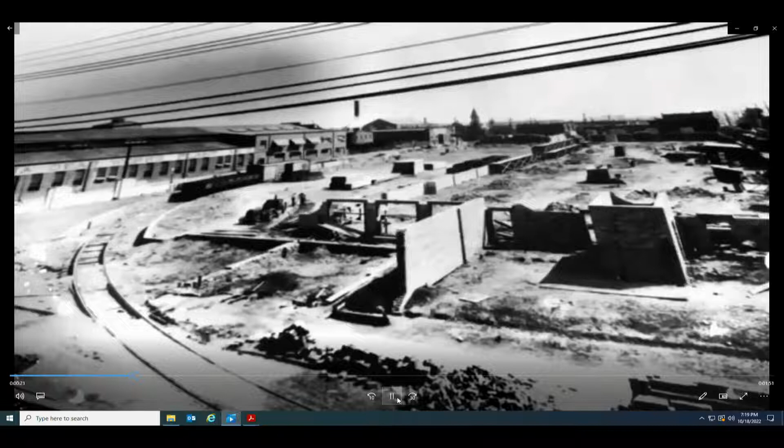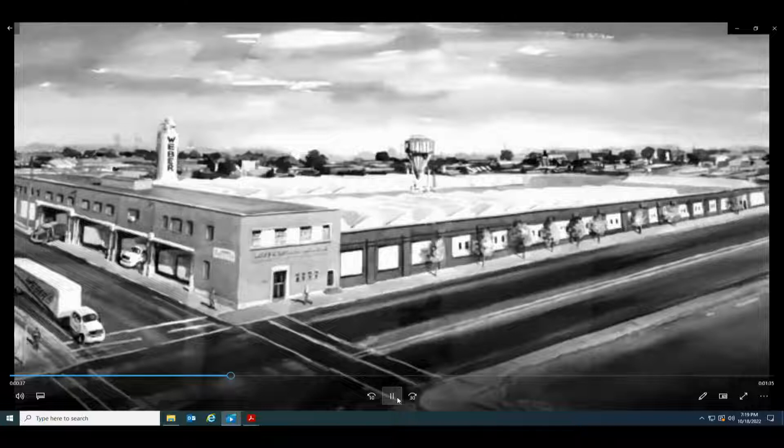Our first product was for a company called Stetson Hat, which back in the day was worn by every man, and we produced the boxes that the hats went into. It's a great story that a company has been in one industry and one location since the late 1800s. There's certainly not many companies that can brag they've been here for 125 years and still successful on top of that.

I think we've really been successful because of our people. We've all seen the old photos on the wall of the building being built and all the advertisements from the 50s and the Greater Philadelphia magazines. I find it an incredibly exciting opportunity to try to extend the legacy of people who came before us. You can only hope that it continues to grow and lasts 125 more years.

The facility we've been in right now, we've been in for 93 years. Today we employ about 170 people. Our sales are nearly $70 million. I think you can buy a lot of corrugated products without much personal interaction, but when we do it, we have a touch to it, and I think we hit the mark more often than we don't. The future brings a craziness that the country is going through as a whole, with speed to market, quick turnarounds, and competitive pricing. The future looks very bright for Weber Display and Packaging.

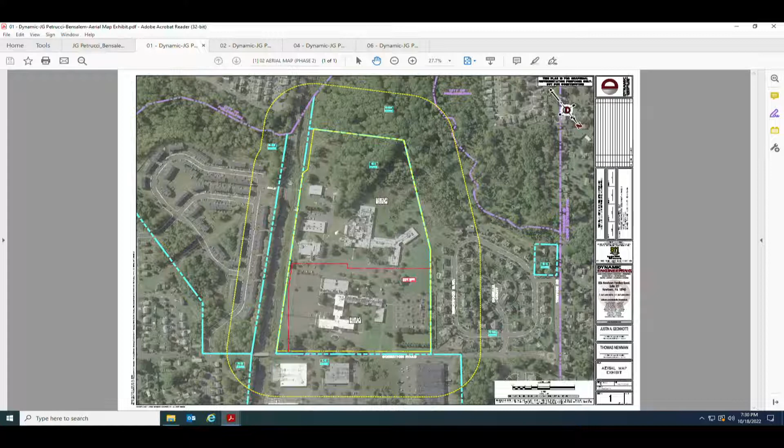There's 2 plan sets. Phase 1 is just showing the demolition of that existing building and the other existing building, and the reconstruction of an access road to serve Suez. So all these buildings back here are going to remain office buildings for Suez on a separate lot. All the parking facilities will be left in place to serve that facility.

Moving on to phase 2 of the plan, this is where you see the construction of that manufacturing facility along the frontage of the road. Right, so that's okay. Are there any assurances in our zoning or otherwise that the back would remain an office building?

I'm a little concerned that you have a manufacturing building in the front, and then you sell the office building later to another manufacturer, and then you have more trucks coming through. The lease that Suez has with Petrucci, the owner, is another 12 years, so that's all I know, that it's going to remain there for that length of time. Suez wanted, as part of its sale to Petrucci, to retain for at least 12 years the opportunity to continue to lease that space in the back, so.

Okay, Joe, is there anything that can be done zoning-wise or restriction-wise to just say that it's an office and not a manufacturing? Or is it too late? Well, the one question that I had, which is sort of along the lines of yours, Mr. Knowles, is...

I didn't see on the plans, but it may be there and I just missed it, an indication of an access easement from Lot B out to Somerton Road. I see the condition, a driveway shown, but I don't see any sort of an easement over the separate parcel. Right, that's in the review letters, and that is a condition of approval that we have to provide that access, part of which will be on the future Weber lot, that they'll get back there with that.

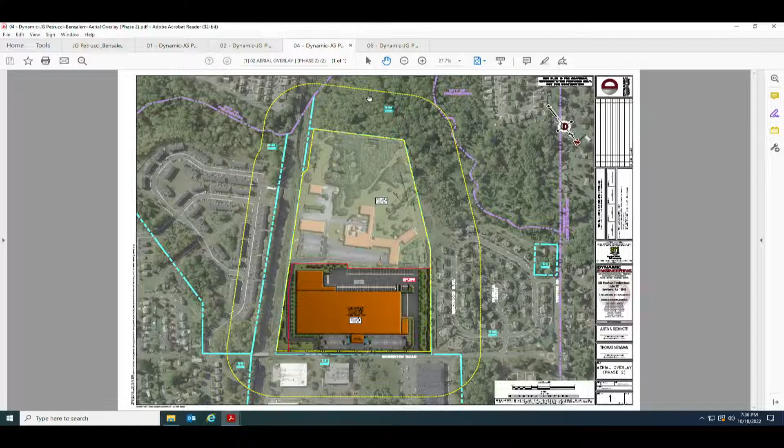I know, like part of the spot zoning - part of the township's vetting of this project up to this point has been that the rear would not be industrial as well as the front. That the rear would remain office, which was at least part of the consideration as the township was vetting this, particularly in terms of the proximity of the property to the residential properties nearby, that you wouldn't have manufacturing or industry both in the front and in the back.

Again, as you've heard this evening, the intent is, and the lease reflects, at least for the moment, that the offices in the rear would remain as such. But if tomorrow, for whatever reason, the office were to close up shop, then yes, whatever's a permitted use in GI would be a permitted use on that rear acreage.

But that doesn't have anything to do with what we're doing right here. No, other than the fact that Mr. Knowles asked a question. Right, so we can go forward with this and handle that later. Yes, we're going to do the other later.

Let me ask you this, as a gentleman's agreement, would you be willing to come to the township and make a presentation that you would request a change of zoning to allow offices to be there? I'll be happy to take that back to Petrucci. Greg's not here this evening, so...

It would be better if you were cooperative with it. That's right, we could do that anyway. Different firm, different situation. Yeah, I know, you don't own it. Bring it back to him. Okay, I'm just putting it out there for consideration.

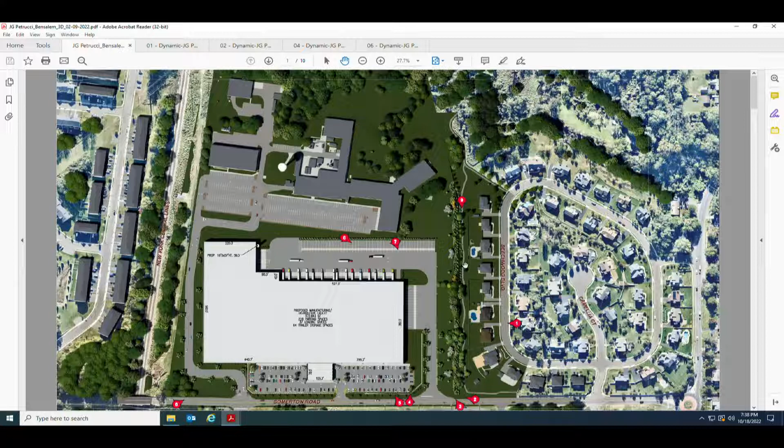They had a walking trail and a buffer already in place between that residential use and what's always been an industrial use. As part of this improvement, there have been discussions with township staff, and there's going to be a substantial buffer added between the two uses, with substantial plantings to enhance the buffer that's already there today. Due to the topography of this site, the manufacturing building itself is set at a much lower elevation than the neighboring residential use.

We did that on purpose so that the area between the residential area and that access drive is actually a berm, which puts the landscaping at a higher elevation and helps to screen the building as you drive down the road. That walking path you see on the screen exists today - that's not an artist's depiction, that exists as part of the development of Beechwood Estates.

The property line is right on the edge of that walking trail, so everything to the west of that is going to be additional open space, owned by Weber but protected that way. Your ordinance requires 90 feet of green space between the property line and any improvement, which we're providing. The building is another 200 feet away from that, so between the property line and the building you're at least about 300 feet away, with an enhanced buffer and substantial grade differential.

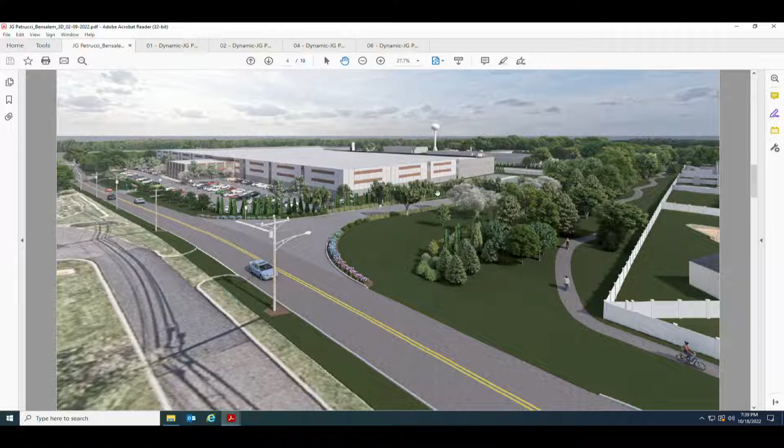Is there any other questions from council members? Is there anybody in the public who would like to come and speak for or against this plan? Okay, seeing no one come forward...

Is there a motion to approve this as a preliminary and final, which is one of their requests, with the will complies? I put a form of motion, Mr. President, that we approve the applicant based on the October 12th, 2022 traffic planning and design letter. Relative to this, the applicant will comply with all the zoning issues that have been resolved to this date, and we go to the subdivision and land development ordinance.

I'm going to go to section 4. I'm going to ask that the applicant will comply with 1, 2, 3. I'm going to ask that we grant a waiver for number 4, and the applicant will comply with 5 and 6. The applicant also will comply with the stormwater management that's been presented to us. And that's what I have.

Joe, you have anything else to add to that? Yes, as was suggested at the outset of the hearing, the applicant will comply with all of the requirements of the township fire marshal and the fire rescue department as they apply to the plan, and will comply with the requirements of the August 31, 2022 traffic review of TPD. The applicant will provide to the township engineer and the township solicitor for review and approval deeds for the newly created lots, which reflect the easement as well as any easements required, and an easement agreement for access from Lot B to Lot A. Those would be the conditions for council.

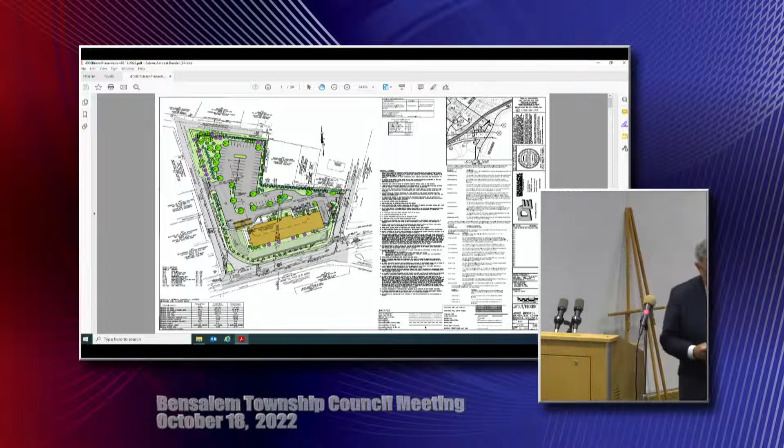The plans before you tonight are dated October 12th, 2021. They've been revised 3 times with the last revision date of September 15th, 2022. We are requesting waivers, and for the council's edification, I could provide you with a list of those requested waivers along with justification. That's an old one, so we wanted to update it and provide you with the current. Thank you.

I have John Richardson tonight from Dumack Engineering. He'll just review quickly the site and then go through the requested waivers and the comments for the township professional review letters.

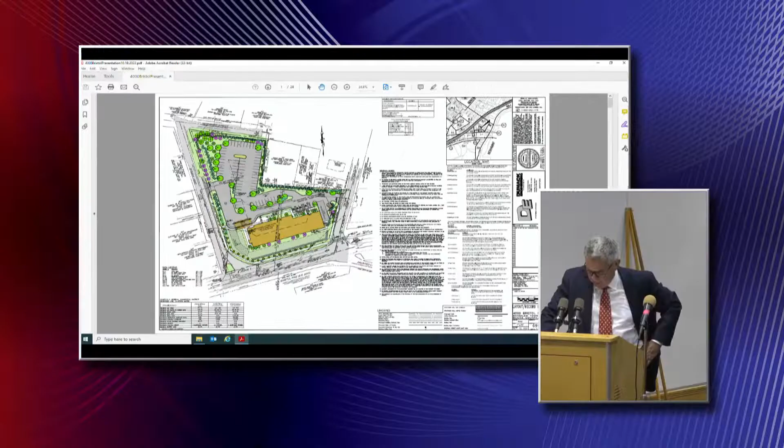There is one issue that I wanted to bring out at the beginning, and that is the denial of the fire marshal to the original plan. We've been working with the fire marshal, and I believe Mr. Pizzo will advise you that we have satisfied the fire marshal's concerns by way of several tweaks to the plan. Mr. Richardson can go into more detail.

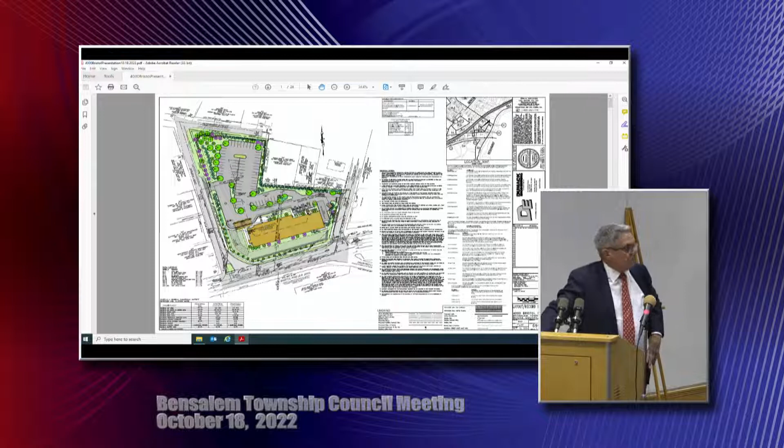Basically what we're doing is we're adding an additional fire hydrant. There was one proposed, we now have two. We're relocating both of those fire hydrants. If you're looking at the plan, they would be on either end of the hotel on the rear portion away from Route 13. He also requested some bollards and a chain across the fire lane on the side of the building to the left of the plan, and asked for the relocation of the fire department connection to the loading dock, which we've agreed to, and also the removal of some shrubbery so that the fire department connection is highly visible.

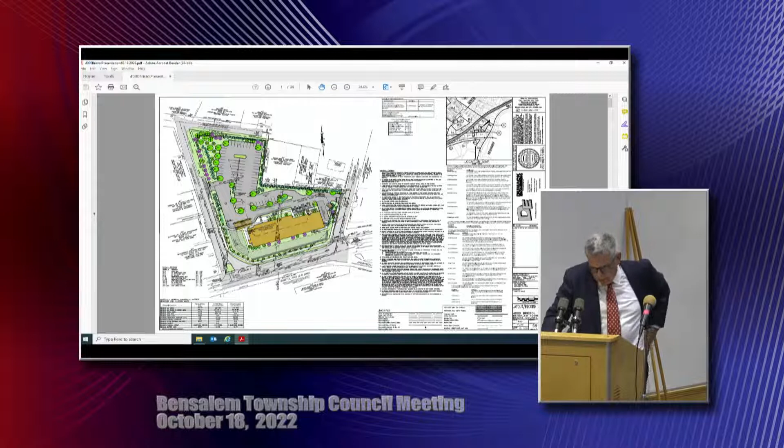So that was the gist of the conversation, and I believe once we go through the review letter, that will be item number 29. I know the review letter looks extensive, but so the council understands, of all the comments, there are 4 that are will-comply, 11 of the comments are waivers that we're requesting, 1 comment is informational in nature, and the other comment had to do with the fire marshal.

Those are the SALDO comments. And then with the stormwater management ordinance, basically they're either will-complies or requesting waivers. So even though it looks like a lengthy, convoluted review, I think you'll see that it's pretty straightforward. So with that, I don't know how you would wish to proceed, Mr. Knowles. Yeah, he can present this, and then if we have any questions, we'll have an opportunity to ask him questions, I guess.

All right, that's good. So the T&M review letter dated October 6th of 2022, that's the third review letter. I'll go through that. The first page, there's nothing on. The second page, these are all just informational comments. The third page, item number 1 is a will-comply.

Is this under subdivision? Yes, this is under subdivision and land development. Okay, so you're talking about Chapter 202, page 3. On page 3, D1 is a will-comply. On page 4, D6 is a will-comply. Number 11 is a will-comply. Number 14 is a will-comply.

And then 15, 19, 20, 21, 22B are waivers, as is 22. So that's 15, 19 — the 16 and 18 are done. 19, 20, 21 and 22? 21, 21B, 21C, and 22 are all waivers. Okay.

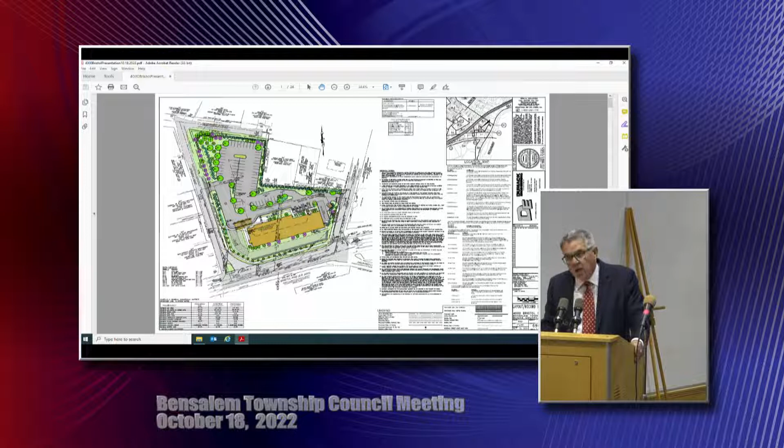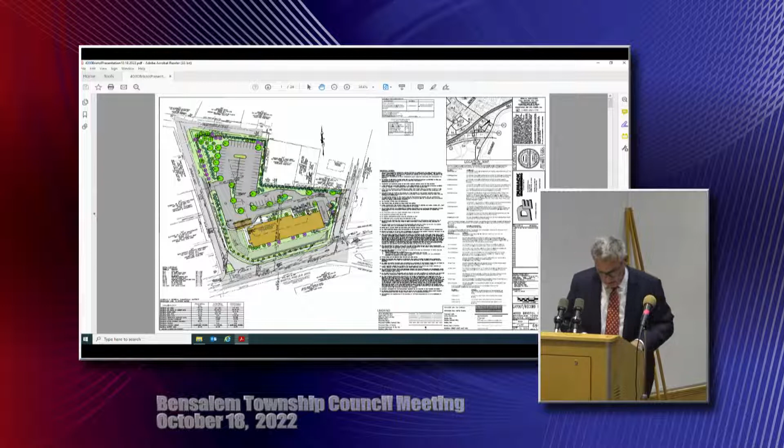Would you like to go into the traffic? Or would you like to discuss that? Maybe have somebody that could generally tell us what each waiver is. Oh yes, sure. I didn't know if you wanted to cover that now or after we went through all the comments. No, I'd rather cover that now. So I'll have Mr. Richardson go through those waiver requests, so we can have a general idea what the waivers are, and then Phil can make sure that he's fine with them.

Good evening. I'd like to refer to the letter Mr. Tovine just elaborated on, specifically the waivers, going through the same letter point by point. This is in regard to number 15 from T&M's letter, the waiver request.

Wait, which letter are you referencing? We asked you to do it the other way. Do the letter dated October 6, 2022, and go through the numbers we just discussed. The first one would be grading, number 15. There was some confusion about which number was said, but it was confirmed as 15.

That's a waiver to allow grading within 3 feet of a property line. The property has already been developed, with existing features and modified topography within 3 feet. To remove some of those features, we have to provide grading within 3 feet of the property line.

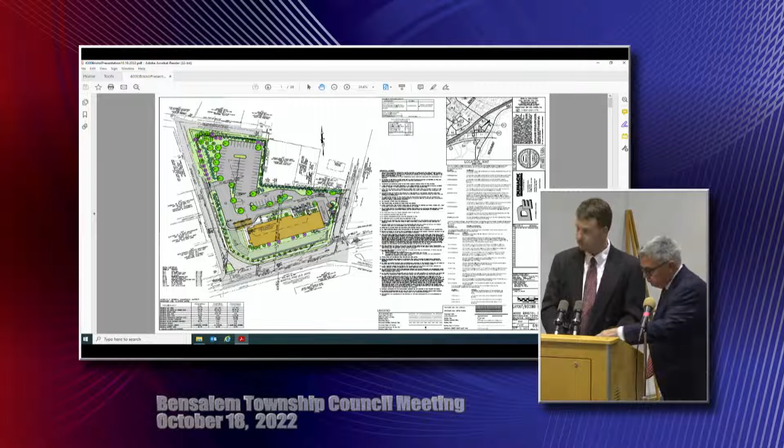Are your calculations based off of the 100-year flood? Correct.

And you correct me if I'm wrong, but she's saying that to help the neighbors in the back with the flow, you have to do it that way because of the way the ground goes. Correct. Yeah, I know, again, I'm not an engineer, I'm not an attorney.

But when you're telling me the difference is 4 inches versus 12 inches, I can calculate that and say it's an 8-inch difference. Yeah, that's a lot. I mean, I don't know, maybe I just don't know what I'm talking about.

There's 4 inches between the water level and the top of a manhole cover. It doesn't matter whether it's 4 inches away or 12 inches away, as long as it's not coming out of the top of the manhole cover. 4 inches is a splash away, as opposed to a foot away. We essentially have 4 inches of freeboard, if it goes above 4 inches. Would you rather have 4 inches of water in your home or 12 inches?

Hold on, wait, that's not what they're saying, that's not what he's saying. So you're supposed to have 12 inches at worst-case scenario. Is that correct? You have 4 inches at worst-case scenario. So that's a loss of 8 inches, not a gain. There's a gap of 8 inches. There should be a gap of 12, there's only a gap of 4.

This is what we're talking about. If there's a gap between the water level and the top of a manhole cover, it's still not getting out by 4 inches because of this elevation. The difference is 4 inches between the water and the top of the manhole, or top of the grate. Now, if you go lower, you don't have enough pitch for the water to go where you need it to go. So they're going with a narrower or a shallower inlet, so to speak, that allows for flow through that.

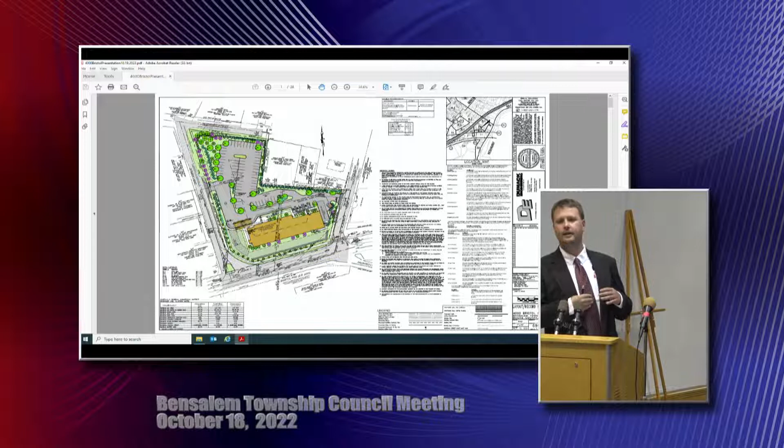In regard to the absolute number, let me just get the number. It's two inlets along that property line that this would apply to, and then there's one down by Bristol Pike that the same thing applies to. That's completely on our property, and it's actually the outlet from the dry well. And that again is down low by Bristol Pike, so that's completely contained on our property. So it's a total of 3 inlets.

I believe we're on number 19. 196-61B12, and that is to allow less than 24 inches of cover over pipes. This is kind of the same area, it's that low grade. We are providing the manufacturer's recommendation for cover over the pipes. That 24 inches is probably a reference to RCP pipe. The plastic pipe that we're proposing, we're following the manufacturer's recommendations with the 12 inches.

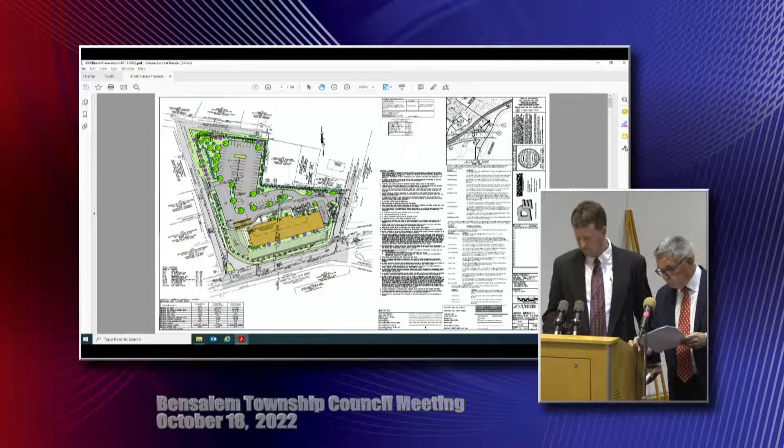And where are they located at? Primarily right along there, it's again the low freeboard. So it's the drainage for the manhole cover, for what's going into the inlets, coming down, going into the inlets, into the drain pipes, and the drain pipes will be 12 inches down rather than 24 inches down? Correct. Is that basically what he's saying? Which is one of the reasons that you use the flexible pipe now, so you don't have to dig as deep to catch the water.

And the 12 inches is adequate by the manufacturer. Now when you say adequate, I know we're supposed to go down a certain depth for pipes for frost and freezing. How does this affect all that? I'm thinking of the frost line, the freeze line.

Are you talking about it backing up from freezing? Well, no, if something gets into the drain system that backs it up - dirt, who knows - it could be anything that backs up a system. I'm saying then the water would accumulate and freeze and back up the whole system, would it not?

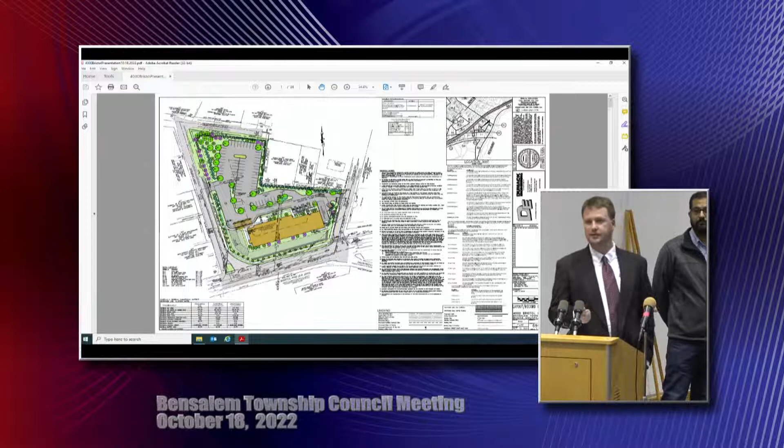And we're providing a fair amount of landscaping on the corner property, and we're providing some landscaping all along Bristol. Are you interested in the species and stuff like that? Will it be something tall?

I'm worried about the lighting going into, I believe, 4 houses on Neshaminy Street. I'm also concerned about the safety of the neighborhood, and I do appreciate that we're getting rid of a lot of the issues on the backside. I'm not discounting that, I'm just asking, since you're doing these improvements, especially for the 3 houses that buffer up to it, in terms of making it safer, so somebody's not just walking through to their property through a tree and having issues there. In today's world, unfortunately, you have to ask those questions.

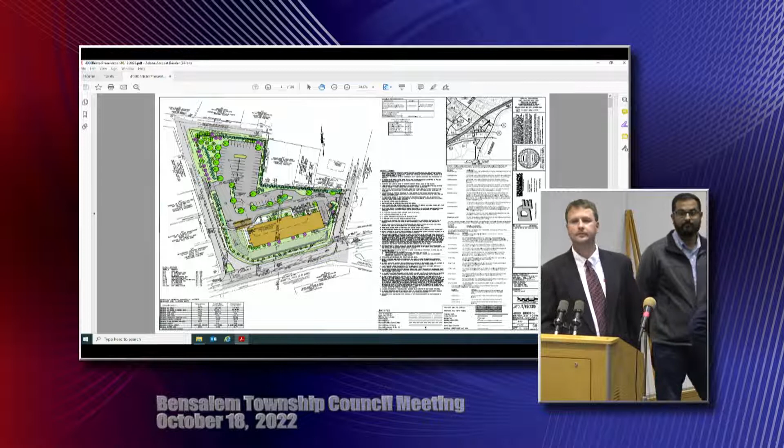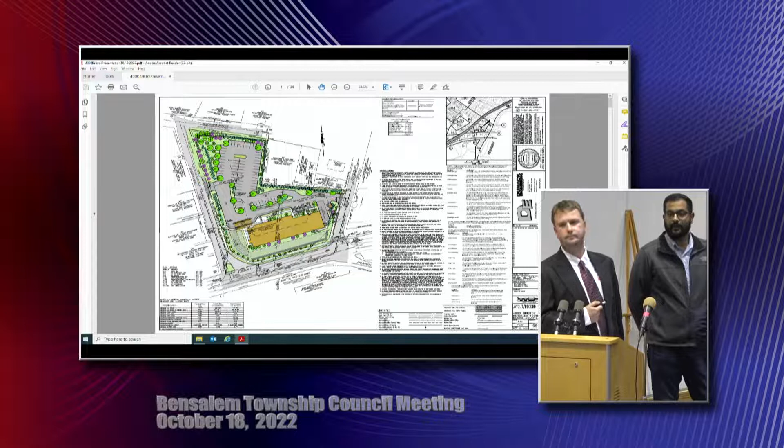So do you want to provide fencing along the back, along Chamonix Street? We were going to do it anyways in the future, we were looking at it. Okay, because it would make more sense, for the safety of those people. I do appreciate the fact that, I know what you guys deal with now. Okay, so we'll do a 6-foot privacy fence across the back?

We can do that, not on the right though, there's nothing there, just woods. Right, across the back, between where all the neighbors are, we would fence it, where the neighbors are on Totem, the neighbors you get right off of there, and then along that section right there, not on Chamonix Street. On Chamonix Street, you're going to have a buffer of trees, I think.

In regard to lighting, we are providing lighting in the parking lot. We provided calculations to the township that show that the lighting levels are at an acceptable level at the property lines.

And you'll make sure that if they ever go out, you get them fixed quickly, because the one at Chick-fil-A up on Horizon Boulevard's been blinking for months, like a strobe light. Well, the ones we're proposing are LEDs, so they don't strobe, supposedly. They're supposed to last 20, 30 years. So they won't be facing anywhere into the neighbors on Chamonix Street, they should be going straight down, to not affect those houses.

You're going to add the fence to the plans? We'll add that fence to the plans. Okay, so that would be an additional thing. That's an additional thing for the fence, we're just saying it. Is there any other questions?

If not, is there anybody that would like to speak for or against this? Before we go any further, I have a question. I think you may have answered it earlier, but I want to make sure that you have an underground basin, and where is that?

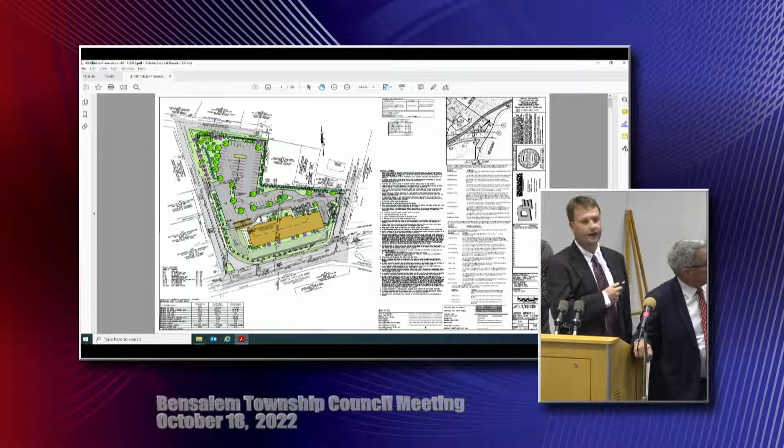The underground basin is kind of an L shape roughly, and it goes along here. It discharges down into an existing storm pipe that then discharges down to Neshaminy Creek. As part of the development, that piece of pipe that goes down along there is inadequate. Not only are we reducing flows to that pipe, but it's so inadequate that we're actually increasing the size of it from a 24 to a 30 inch.

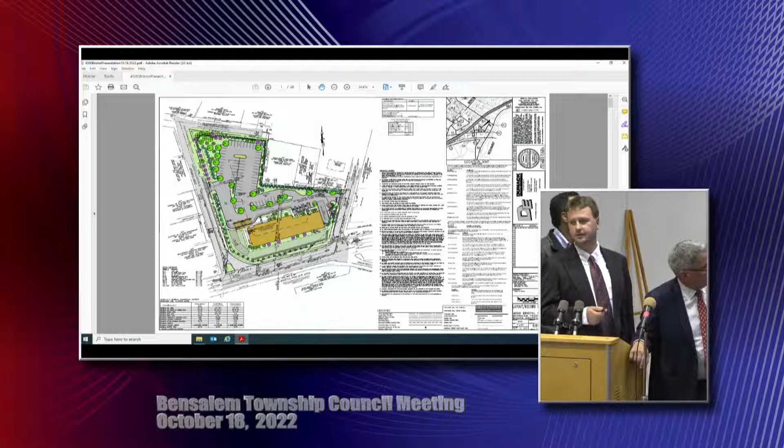That's a good location for it, okay, that's good. I wasn't sure if it was up there. Yeah, and that takes it all the way down and literally discharges into the Neshaminy. That's good.

That was it, Jeff, okay? All right, Phil, do you have something to say, or are you okay?

No, the pipe issue and everything else, they have to get a PennDOT permit for that. Right, all that issue too, good.

Okay, so is there anybody that would like to speak for or against this project from the public? Okay, seeing no one come forward, we'll close public comment. Does someone want to make a motion in reference to...

Sri Gayatri Corporation, 4,000 Bristol Pike, the new hotel, tax parcel 276-70 and 276-741.

I'll make the motion, Mr. President, although I got lost a little bit through there, so Mr. Pizzo, you can pay attention to me, help me out on this one. This is for Sri Gayatri Corporation, 4,000 Bristol Pike, and the tax map parcel is going to be...

02076-070/02076-074-001. My first part of the motion would be to make sure these properties are going to be consolidated into one and recorded up in Doylestown, and that presented to our solicitor. Is that correct, Mr. Joseph? Yes, a deed of consolidation will be presented to the township for review and approval by the township solicitor and the township engineer, and will be recorded contemporaneously with the record plan.

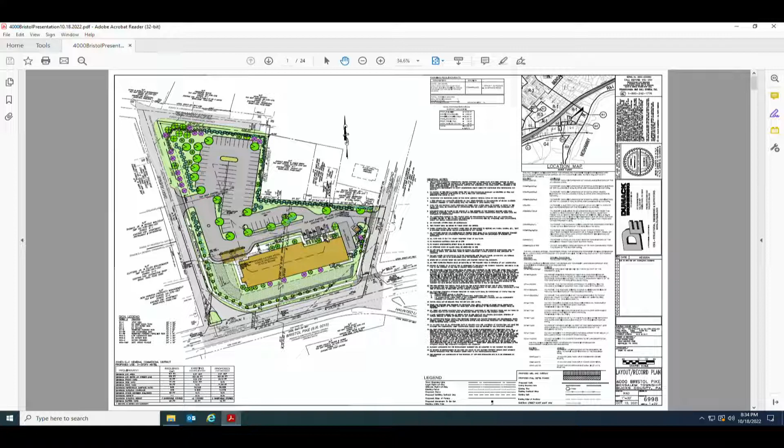Is there anything else, gentlemen? No, I think you're good. Mr. Pizzo, as far as you know, Mr. Kisselback's motion is good? That's correct, and there is an acknowledgement that the property has already been rezoned by court order from AD to entirely GC, and that the consolidation has already been referred to. That'll be done as part of the filing of the record plan.

Okay, so we have a motion to accept for 4,000 Bristol Pike, according to Mr. Kisselback's motion. Is there a second? Second. Ms. Benitez, all in favor? Aye. Any against? No.

Good luck. Thank you. Hopefully it'll be a nice thing there, and we clean up that area. Be a good neighbor. Absolutely. Thank you, sir. Good luck. Congratulations. Thank you, guys. Yep, thank you. Thank you.

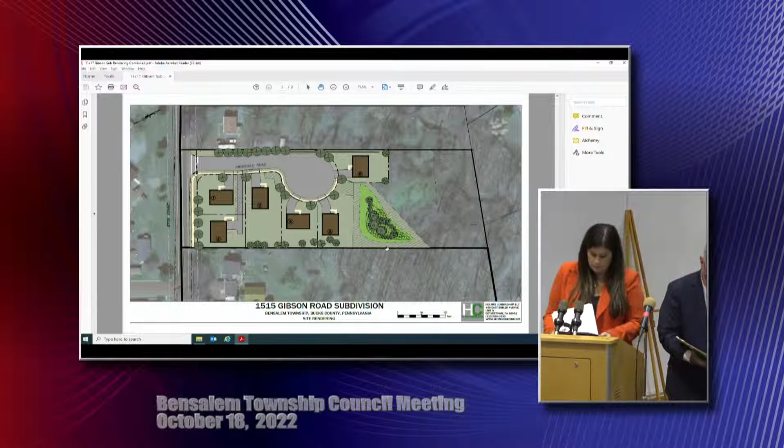Is there any questions regarding the development itself, or any questions or concerns anyone wants to address with the engineer? Yeah, I have a question. The one lot, I guess it's number one, I can't see it from here. The bottom lot, there's two piggyback lots on top of each other. The bottom lot, Lot 2, why is that not defined as a flag lot?

It has frontage along Gibson Road, so it meets the requirements of a standard lot due to the frontage, but the access is being taken from the cul-de-sac. So the driveway has an easement over Lot 1 to take access to the cul-de-sac, but it has the required street frontage along Gibson Road.

So the person on Lot 1 now loses that side to use because of the driveway? So in essence, they're paying taxes for somebody's driveway? Yes, it is subject to an easement along that portion. Is it also going to be their driveway too? There's a separate driveway shown for Lot 1. Yes, and Lot 2's driveway goes across Lot 1, and it's a paved driveway.

Which would be part of the impervious surface for Lot 1? It would be, yes, because the easement doesn't come out of the lot area. So yes, it is part of the impervious surface, and it is compliant with impervious coverage.

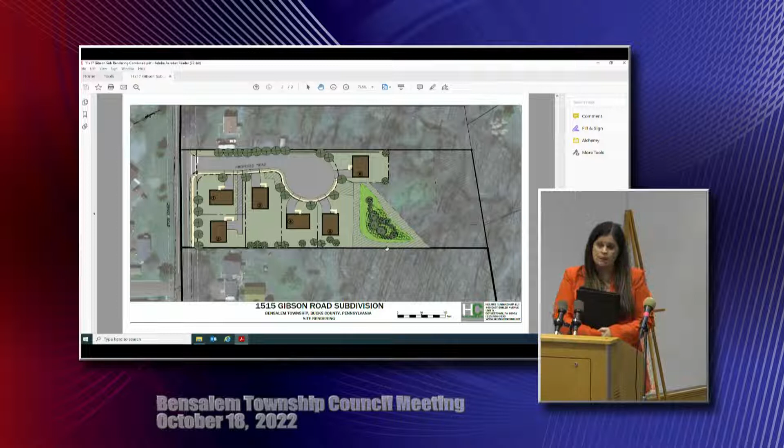But if Lot 1 wants to do anything, now they have to consider this paved driveway on the side of their house? They would, and part of the reason for the location of that driveway is keeping direct access off of Gibson Road. As for the location of the cul-de-sac, if you recall the earlier iterations, we had the road more centered on the property.

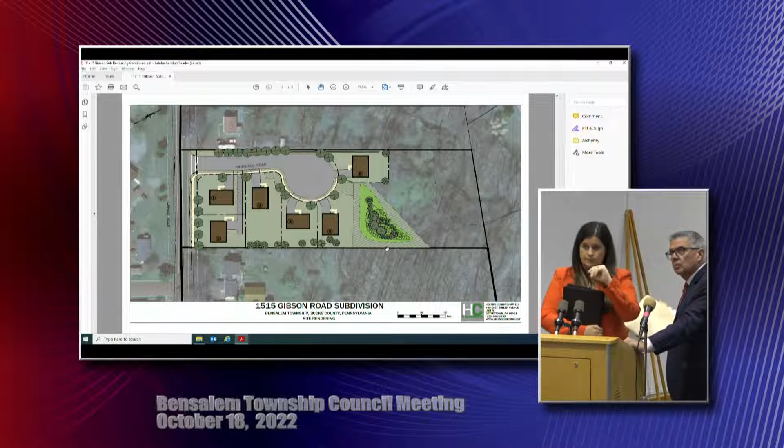So this cul-de-sac has been relocated towards the western property line, top on the view of the plan, in order to maximize sight distance along Gibson Road, entering and exiting the cul-de-sac. This was a big reason for the change on this plan, to optimize that sight distance, and that same goes for that lot too, making sure it doesn't have its own access to Gibson Road.

Understanding that all access is collected through the cul-de-sac first before exiting. And anybody buying Lot 1 would obviously be fully aware of the existence of this easement across their property and the inability to use that particular area. And how much area, what frontage does Lot 1 have besides the frontage taken up by their easement? Frontage for Lot 1? Yeah, Lot 1 has frontage across the front, right?

Right, it has frontage on both Gibson and the cul-de-sac. Okay, on the cul-de-sac, how much frontage does it have that's not an easement? Does it have 75 feet plus the easement? Yes, it's a wider width along that portion of the cul-de-sac. It has the 75 feet along Gibson.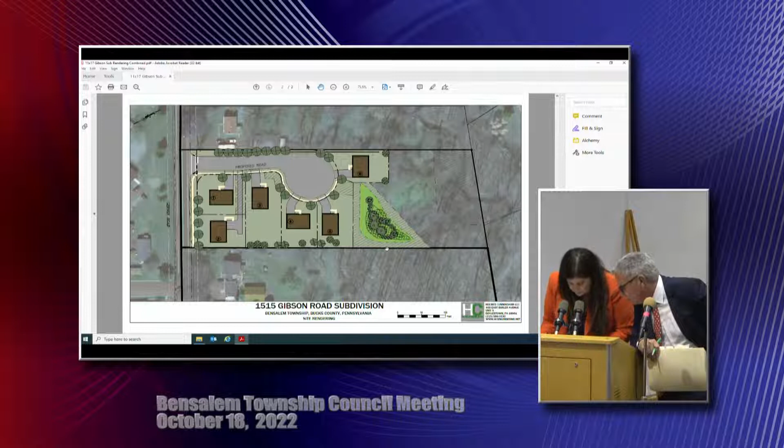So Lot 1 has 57 feet between the points of curvature of the radii of the right-of-way along Gibson. So it has approximately 80 feet to the curvature of the right-of-way. So it's 80 feet before the easement starts.

So then the easement's another, what, 20 feet? 20 feet, yes. So it's 100 feet total, from Gibson Road to Lot 2. Yes. And 20 feet of it's an easement. So yes, it still practically speaking meets the minimum lot area exclusive of that easement for its own property.

Now, just to clarify too, that's an asphalt driveway that they have an easement to drive on, okay? Who's responsible for maintenance of the driveway, the person who owns the easement or the person who owns the property? That would be identified in the easement language, but I would imagine it would be the Lot 2 owner. Typically, it would be the Lot 2 owner responsible for maintaining the driveway from the cul-de-sac to their property.

Right, so if it had potholes and stuff, they'd have to redo it, not the person on Lot 1? No, it would not be their responsibility. So why isn't Lot 2, the tax parcel, just taking up that easement? They're the responsible owner and maintainer.

You mean why are we doing a flag lot? Well, they're saying it's not a flag lot because technically they have frontage on Gibson Road. Right, but you can't get out that way, so it's really not an access road in essence. It's a flag lot, but so it is a flag lot.

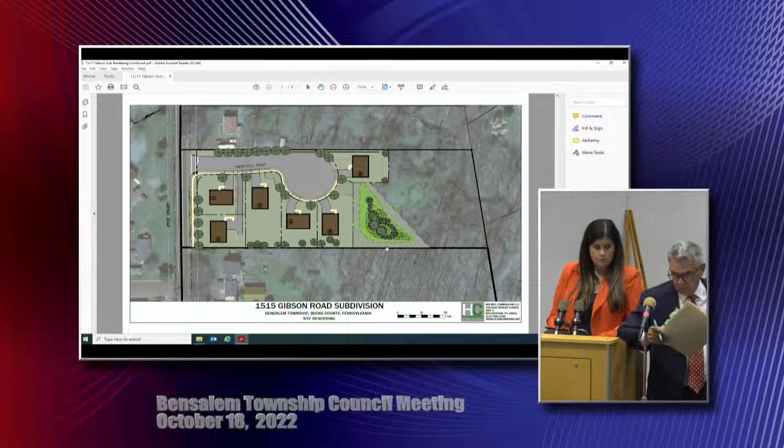Yeah, and so council understands the easement would be incorporated into the subdivision documents, as opposed to us just proposing that easement the same way we'd propose a drainage easement and an easement for underground utilities across someone's property. Levittown has Lower Bucks County Joint Municipal Authority easements across the back of every property, but that's just part of the easement process, not part of the subdivision process.

Mr. Pizzo, what is your feeling on this? It really comes down to council's preference, as you've stated, Mr. Polari, and I think everybody stated, flag lots are certainly not desirable. I think the question was asked, but I'll make sure I understood.

Right now, what you're proposing as an easement across Lot 1, if that were actually to be part of Lot 2 to make a true flag lot, is Lot 1 still otherwise compliant? I believe so, let me confirm. It is on frontage apparently, according to her calculations, but I don't know. It is on lot width, yes. But I don't know about overall square footage.

7,500 square feet is required. We have for Lot 1... and while the engineer is determining that, council could say that you do not want an easement as part of the land development plan. Right, that's what I'm saying.

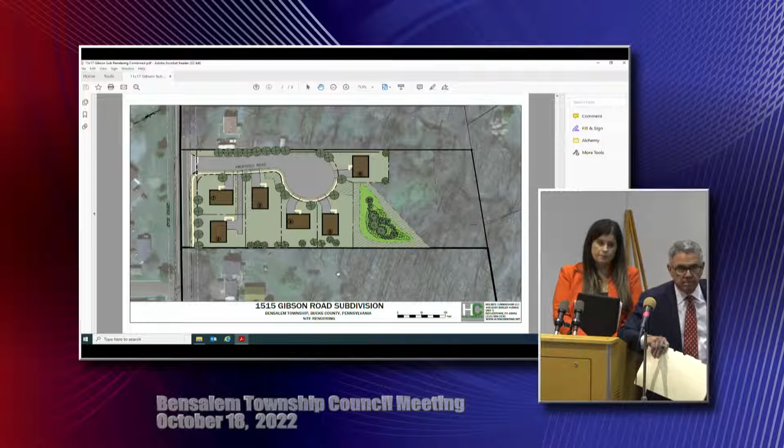But the concern is, Mr. Pizzo, would this open us up to other flag lots because there's a frontage, or only in situations where there's a frontage that can't be accessed because of a highway?

Obviously, every situation that exists anywhere in the township rests on the set of facts that exist for that particular situation. That being said, the preference would certainly be, I believe, from what I'm hearing, to have 5 lots.

That's the preference. That's not what I was going to say, but okay, you're the 5 with the votes, so that's what matters. I think PennDOT would say the same thing too. And if indeed they were going to give access to that property as it sits now, that would be contingent upon us approving it.

If we didn't approve it, they wouldn't have to address that. But if we approved it by saying the access has to be on Gibson Road, then the onus goes on PennDOT to provide that. That'd be my opinion.

And if the one lot owns the ground and they're paying the taxes on it, what's stopping them from saying, you're no longer going to go across my lot? That would be another legal issue.

That's where I was going, Mr. Polari. I think the preference would be if a plan were to be approved with that driveway going over Lot 1, it wouldn't go over Lot 1. It would be owned by the owner of Lot 2, so you don't have issues between neighbors.

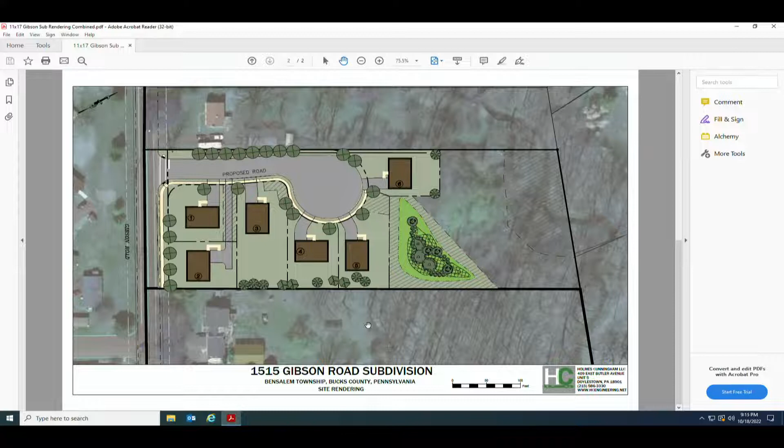Yeah, because we'll have the numbers on what the improvements are on water. And when they control the water, it goes into that basin and it has to work. Post-construction runoff would be less than pre-construction.

And all them trees in the back — from what I heard, I couldn't hear too good back there — are they gonna remain the same, untouched? They'll remain a wooded area, and we're going to put in something that we can inspect to make sure they continue to be a wooded area.

Yeah, there's a lot of wildlife back there, a lot of deer and foxes and all kinds of stuff. I live on the other side of the turnpike, and I see them — it's narrower, but they still come along there.

All right, that's about all I got to say. Okay, thanks for coming out. Thank you. November 28th should be the next hearing, okay? Thank you.

Okay. Yeah, we can ask quick. Before we move on, Quentin, can you come up and give us an update on what was supposed to happen on the property that was supposed to start yesterday?

No, it was Monday. Or Monday? Yeah, supposed to be yesterday. Yesterday, wasn't it? Yeah. So regarding the Popley dirt pile, our contractor has some issues.

He thought he was going to be able to have our machines here to start doing the work this week, which didn't happen due to permitting for the heavy equipment coming in. I did talk to him today — they are coming in tomorrow morning.